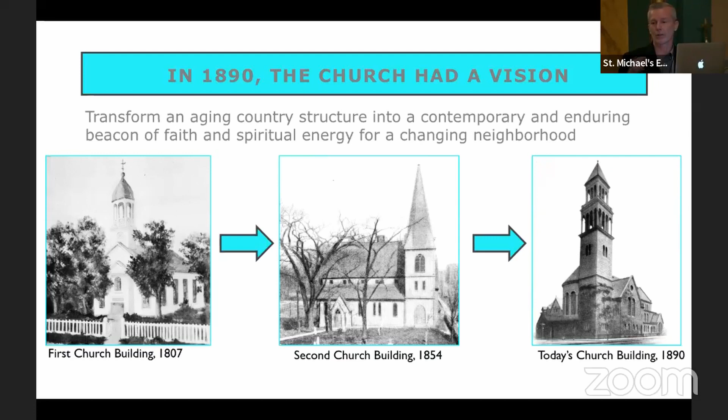Pretty soon after this sanctuary building was built in 1890, the parish house was added next door, about 15 years after this.

The way I've always thought about these buildings that were built in two phases is that our whole complex is really a fulfillment of the great commandment, to love God with all our hearts, and then to love our neighbors as ourselves. I've always thought about this part of the complex, the worship part, where we gather and pray and enjoy music and celebrate together, as the loving God half of that commandment. And I've always thought of the parish house as the loving our neighbors part, our community engagement part. That building was built very much with that intention by our forebears.

It's interesting that that's still how it's used. We use the parish house as a parish heavily on Sundays and Wednesdays, but the rest of the week it's primarily used to serve our community. We house a couple of schools. There are all kinds of groups that meet there, nonprofits that have office space there, and it's heavily used. It's really fulfilling this commandment, the way we use these buildings.

If you look at where we've invested in our buildings in more recent history, we had a big capital campaign about 20 years ago to restore the sanctuary, the Tiffany windows in particular. As we looked as a committee at our whole building complex, it became really clear that the real needs going forward are more in the parish house than in this complex. So we're in this act of balancing the two sides of the Great Commandment, and going forward, we're going to be more focused in terms of investing in our complex in the parish house.

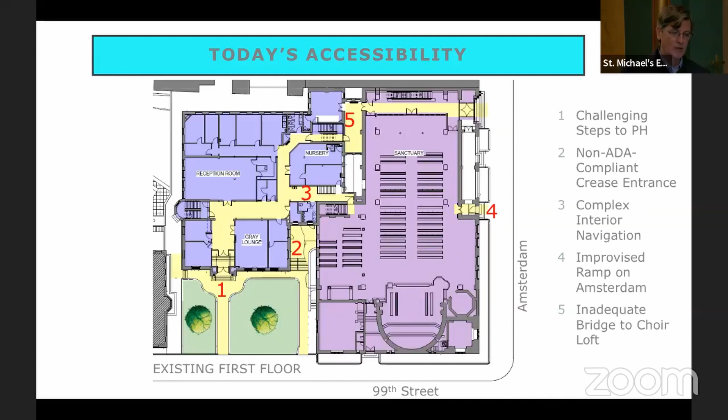Number 4 is the mid-block entrance on Amsterdam, where there is a very steep ramp, and then there's a ramp that can be added, but it's not one that really provides true accessibility—it still requires assistance to get up that steep ramp. And then 5 indicates the bridge from the parish house to the choir loft above. As you know, you go down steps, up some steps, and then down some more steps to get through that. So nor is that an accessible route.

Our effort is to resolve all those access issues. We're starting at the street and eliminating the step from 99th Street into the site. Then at the entrance to the parish house, those stairs will be reconstructed so they are ADA compliant—ADA being the Americans with Disabilities Act—with a much lower slope, a lower ratio of rise to run.

There'll be a ramp down to the playground in the rear and the whole rear part of the complex. And then at number 2, there'll be a ramp from the street down to a landing, and from there an ADA accessible ramp down to the lower level, to the school.

Number 4, over on Amsterdam, the plan calls for opening a door from that mid-block vestibule, then creating a ramp in that porch or loggia that would bring you back to the vestibule of the church and into the narthex, so there's a completely accessible route for people entering the sanctuary.

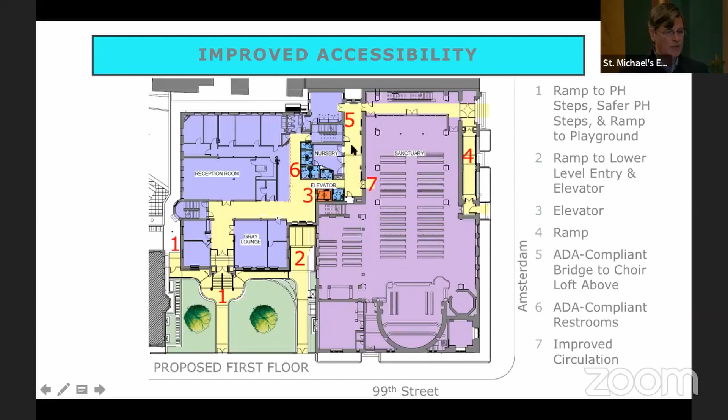This also shows, and I'll get into more detail, filling in the floor of a light well, an exterior light well, adjacent to number 7, which will allow passage directly from the narthex into the parish house without having to go through that stair.

This is a blow-up of the garden. As mentioned, we'll eliminate the steps at the street line, and you can begin to see the ramps providing access to the parish house entry, down to the playground in back, down to the lower level school entrance, and to the elevator entrance. Where there's a path now against the building, there'll be a ramp connecting those two systems, so all of it will be ADA accessible, meeting the American Disability guidelines.

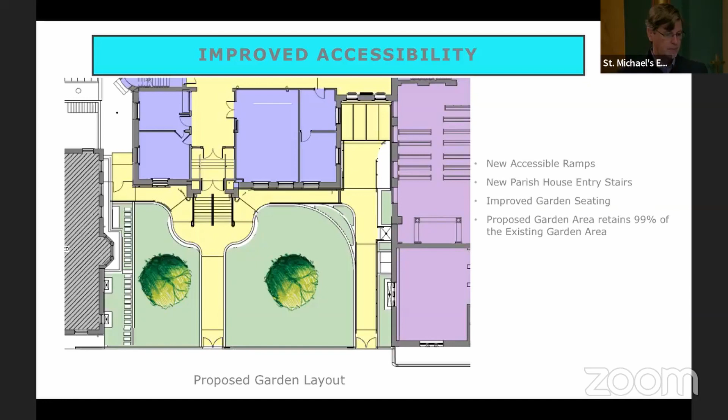As we work on these entries and eliminate those yellow steps, it will require some work on these gates. So we are developing with the committee the design of the gates.

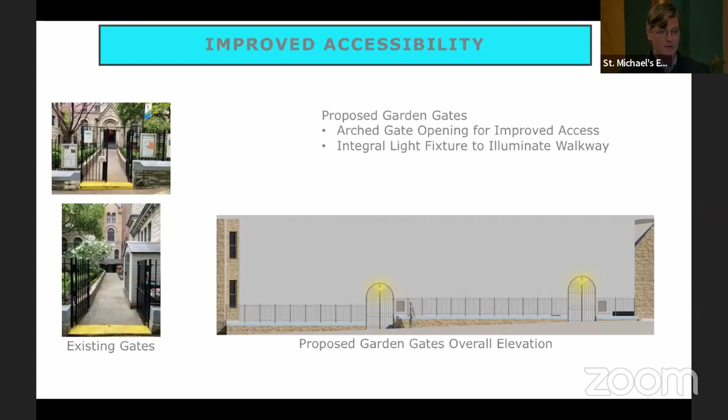This preliminary design shows an arched shape that reflects the arches in the entrance to the parish house and at the east entry as well. Some of the components include that arch shape being consistent with the rest of the complex's design, and it's also a more welcoming, embracing shape. We'd also like to include light in that arch shape, so it provides a pool of light on the entry—another welcoming gesture, as well as having practical aspects.

This is the current east entry, and on the right is a rendering of the proposed approach. As you can see, first and foremost there's a ramp leading down to that lower entry area. The canopy in the existing condition is opaque, creating a dark space between that canopy and those steep steps down to the entry level—sort of dark and a little forbidding.

The approach on the right, part of phase one, has a more gentle slope down to that level, with a glass canopy so light will penetrate into that area, making it much more evident, visible, accessible, and welcoming.

There are other features. As the ramp descends at the corner of the garden, we didn't want that corner to grow too high as the ramp ramps down, so you can see on the right-hand image that the garden will step down as the ramp descends.

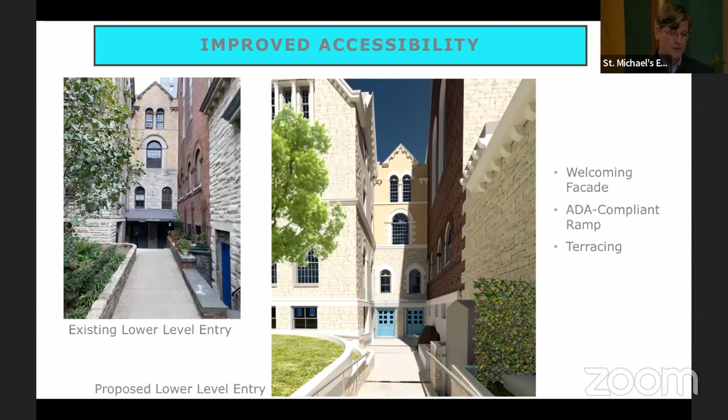On the right is the trash shed, which right now sits right up against the street and isn't a very welcoming presence as you come through the gate. We're proposing to push it further back into the site, and there might be a trellis or something to help conceal it.

This is a blow-up of the ramp on the Amsterdam side. Right now, on the left, you come up a few steps and then there's a very steep ramp, along with a temporary ramp that can be deployed for further access. But it's a very steep condition that requires assistance.

On the right, the intention is to lower that door, create a new door into the loggia and porch, and build an ADA-compliant ramp to the vestibule of the sanctuary and into the narthex, so you'd join all the other participants there.

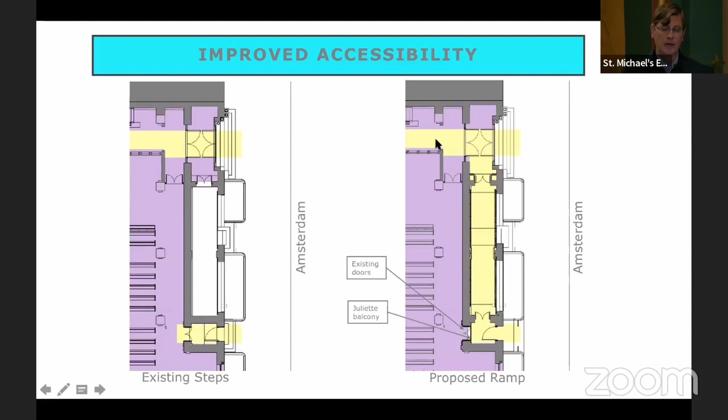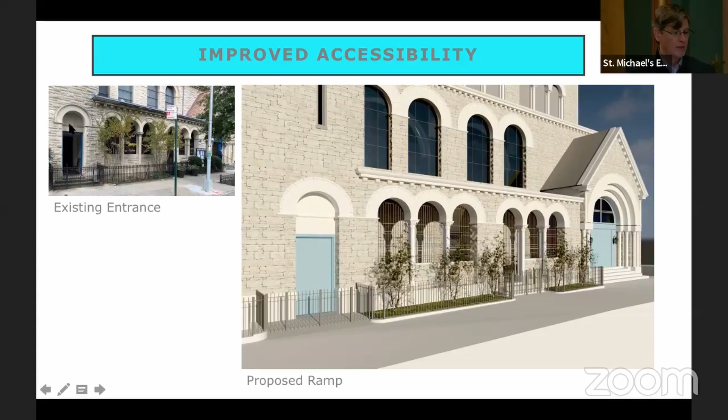On the upper left is the existing condition you're familiar with, and on the right is the proposed version—there's no real difference in those views. The main difference is that this door at the mid-block will be lowered, the stairs will be removed, and you'll have street-level access to the lower starting point of the ramp. The only visible consequence is that the header over that door will get a little deeper than in the existing condition.

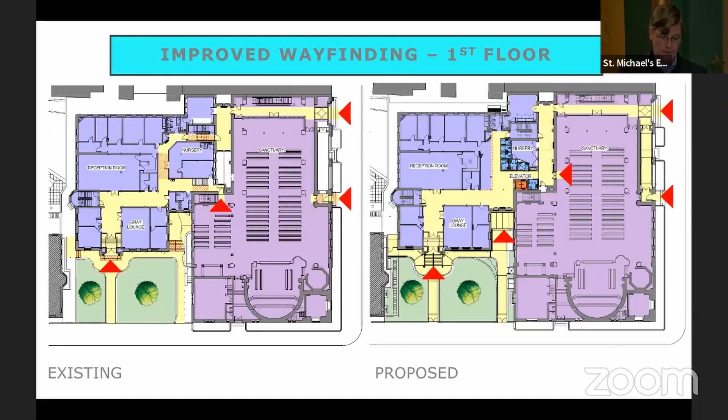This is a blow-up of the lower level. As I mentioned, there will be a ramp—no steps involved—coming from 99th Street on the east side, leading to the elevator on the lower level. This elevator serves all levels of the parish house, and via the bridge from the choir room, also the choir loft in the sanctuary.

As an added bonus of filling in that little piece of floor above, this route also accesses the Saturday kitchen storage, so that deliveries—basically all deliveries for the church, particularly for the Saturday kitchen—can come down a ramp, which will be much more efficient. It'll ease taking trash and garbage out of the building and ease deliveries for all your purposes.

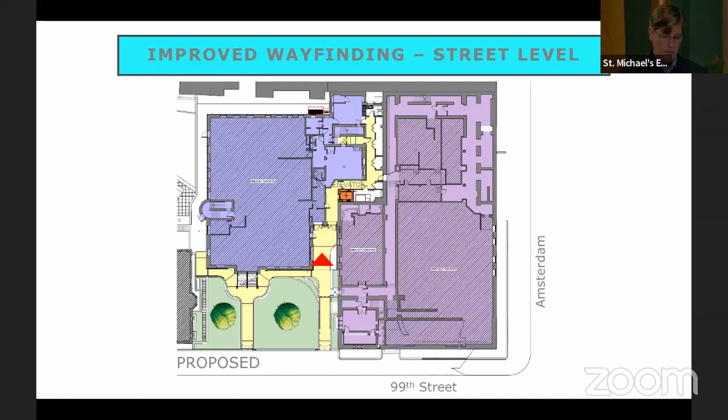On the second floor, the elevator will continue up, giving access through the choir room to the choir loft above. Also, as Walter mentioned, the performance hall will greatly benefit from having an accessible route to it—not just for your own purposes, but for community use. This should greatly enhance the appeal.

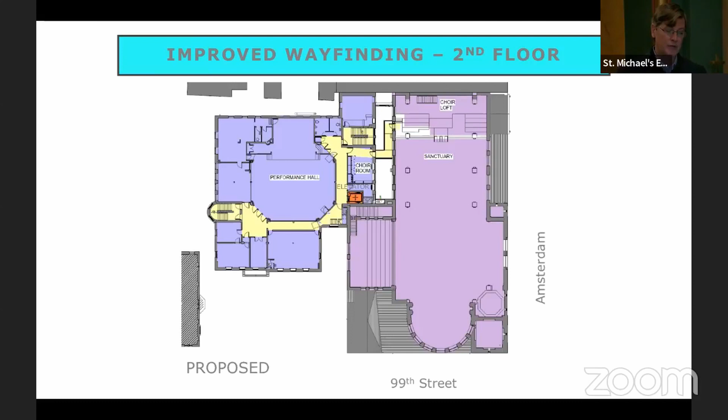So again, the elevator would provide access to the performance hall now, and should it be renovated in the future, that would be an additional incentive for the community and yourselves to use it, to put it to greater use.

This is the space that I referred to earlier as the atrium. It may not be a space that you're terribly aware of, but on the left the parish house is on the left, and the sanctuary is on the right. The two windows you see in front are that little piece of corridor that connects the angel room to the sanctuary, and if you go through the stair, you can get to the parish house from that space. Up and beyond that corridor is the bridge from the parish house to the back choir loft. It's sort of very up and down—I think it was an old fire escape that's been enclosed with plywood. Anyway, that will also become an accessible route.

So on the right, you see the proposed atrium space. Number 1 indicates that we're filling in that little piece of floor toward us from the windows on the left. Number 2 is the new bridge that connects the choir room to the back choir loft.

Number 3 is a door that goes directly from the sanctuary, through this space, and axially connects to the parish house. Number 4 is a new set of doors—windows now, but would become doors—that access the nursery, so that it's directly accessible through this space from the sanctuary.

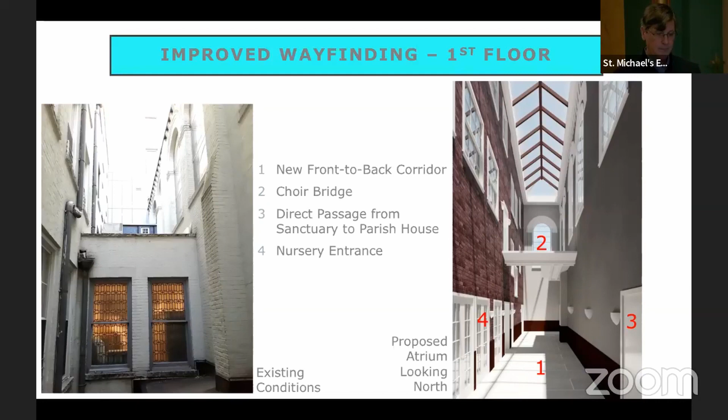This sort of blows up the bathroom layout. As I mentioned, they're pretty much centered in the space between the sanctuary and the parish house, serving both. The orange rectangle is the elevator. There are 7 bathrooms, individual bathrooms with single fixtures. It seemed to us that that is more accommodating in many ways, more private. The handicapped ones will have baby changing tables, so hopefully they'll be more private and serve more purposes in this configuration.

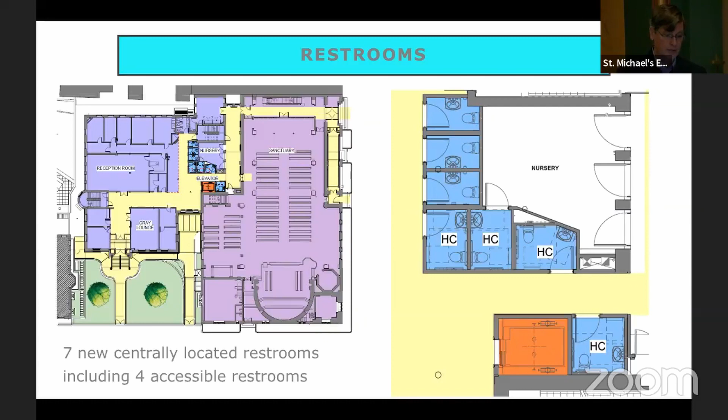And then to go to the critical infrastructure issues that seemed most important to address early on in this series of work. One is the windows, and here you see the condition of some of the double-hung windows in the parish house. These windows are 120 years old, and it's a tribute to Galina and Raj that they've been able to maintain them in functioning fashion this long, but there's only so much you can do over more than a century of weathering. So some are showing the toll.

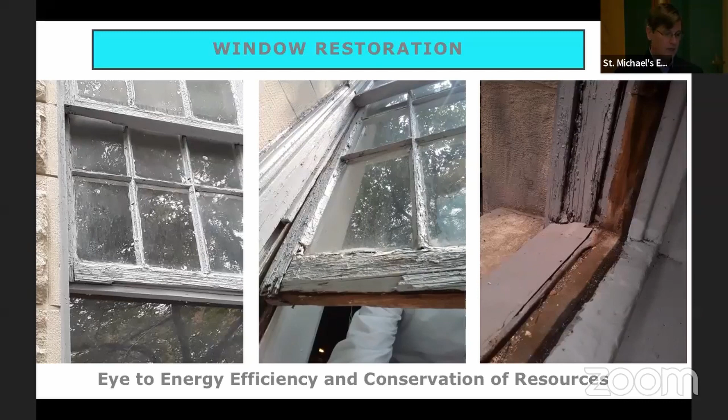But the care that's been given them has really kept them in a condition where they can be restored. So again, this is another place where the character of the complex can be saved, salvaged, restored—that's the intention here. There'll be 97 windows, almost 100, addressed as part of phase 1. 85 will be restored, 12 are too far gone and will need to be replaced.

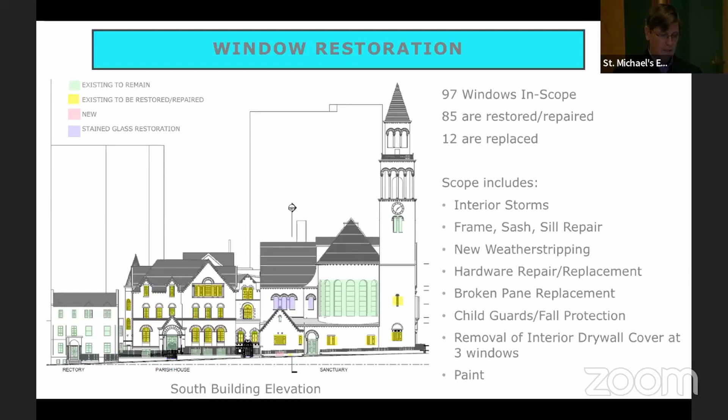It will include not only a repair and partial replacement of members for the sill and particularly the lower part of the sash, but there will also be interior storm windows added. So if there's any draftiness, that increases energy efficiency, both in terms of infiltration and heat retention. That will be a huge benefit going forward.

And then, as Walter mentioned, drainage piping, also more than a century old in most cases. There have been replacements as issues have come up. You may have heard stories of floods in the basement—you can see evidence of some leakage over there by the columbarium. This system does need to be replaced. As was mentioned, we're seeing greater rainfall, and it's predicted to continue increasing, so pipe sizes will be increased, and the whole storm drainage system all the way out to the street will be replaced as part of phase 1.

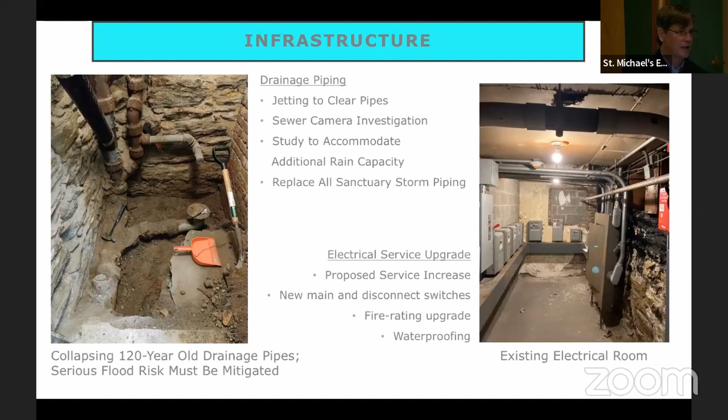On the right, you see the existing electric room. We will need to upgrade the electric service to run the elevator and also to run mechanical ventilation and air conditioning systems needed for spaces like the atrium and adjacent spaces. You now have 400 amps; it'll be upgraded to 1,200 amps. And the infrastructure of this room, which is below grade, leaks, and is not fire protected, will all be brought up to code and to good practice.

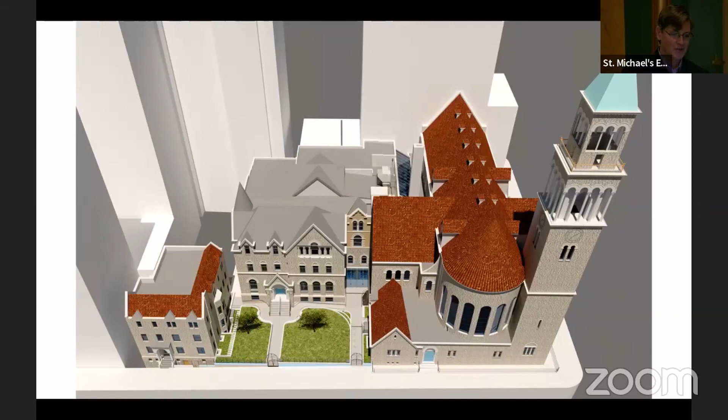Let me say a couple words about schedule. We are now working on the construction documents, which is the phase that will define the work for bidding by multiple contractors, and then the work by the selected contractor. We think the work will take about a year, with some cleanup at the end, as always.

So, John, do you want to just talk about where we stand now? Thank you very much.